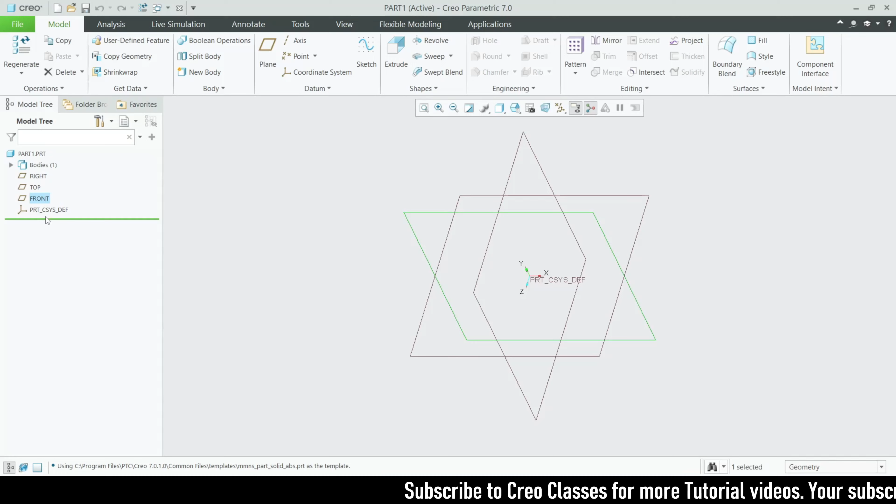This entire part that I'm going to create in this video is based upon my own dimensions. If you want to change it by your own, you can also change it. So I'm going to start with the top plane and go for the sketch view. Here at first I'm going to create a base for our assembly. I'm going to enter this dimension as 500 and this height as 300.

Then OK. Now I'm going to extrude this to a value of 20, then click on OK. So this is going to be our base part. I'm just going to save it and move on to the next part. We can close this, go for new again, click the template, and enter this name as part 2. We have to use the same unit we selected in the previous part so that we will be able to assemble it. So mmns part ABS.

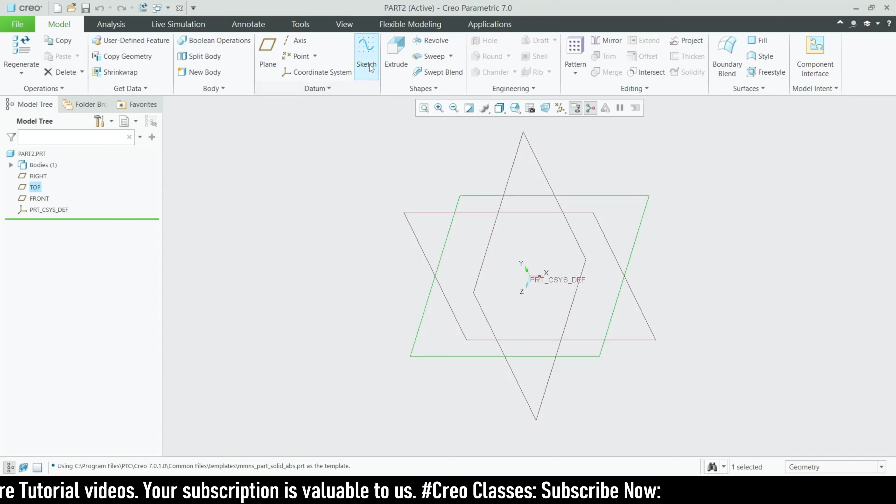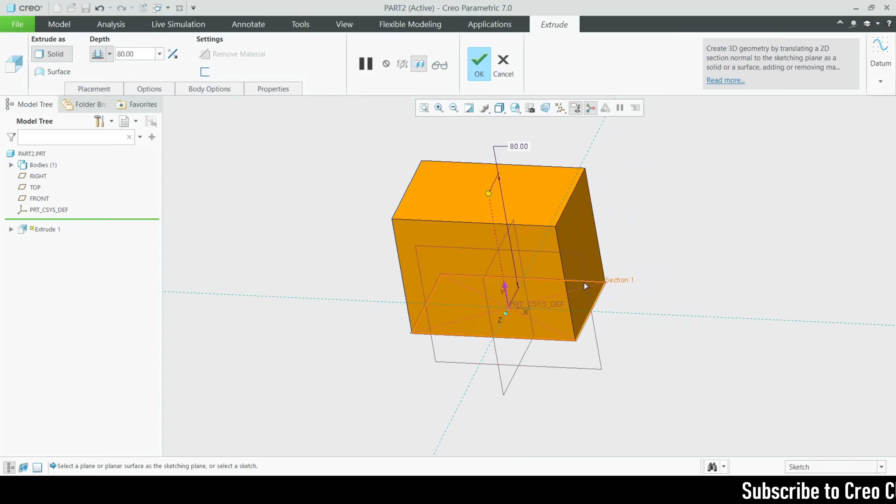Here also I'm going to start with the top plane, extrude, go for the sketch view. I'm going to use the center rectangle again, with a distance of 100 here and a distance of 60 here. Then I'm going to extrude this to a value of 80. Then click on OK. Now I'm going to create a round feature for these edges. So go for round, select all these 4 edges, with a round value of 20.

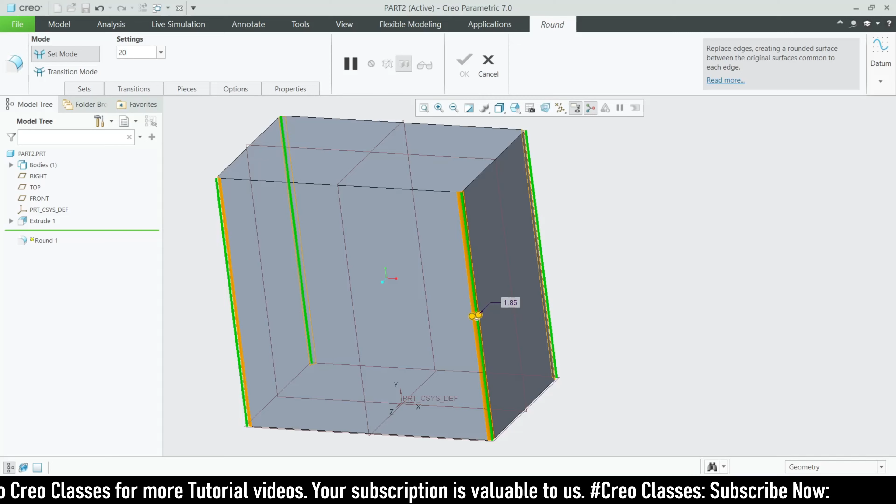Then click on OK. Now this is going to be our tank-like structure, so I need to create a hollow feature for this. For that I'm going to use the shell tool here. Select this surface and adjust the thickness to a value of 3 mm. Then click on OK. Then I'm going to create an input hole here, and we also need to create an output hole on the other side.

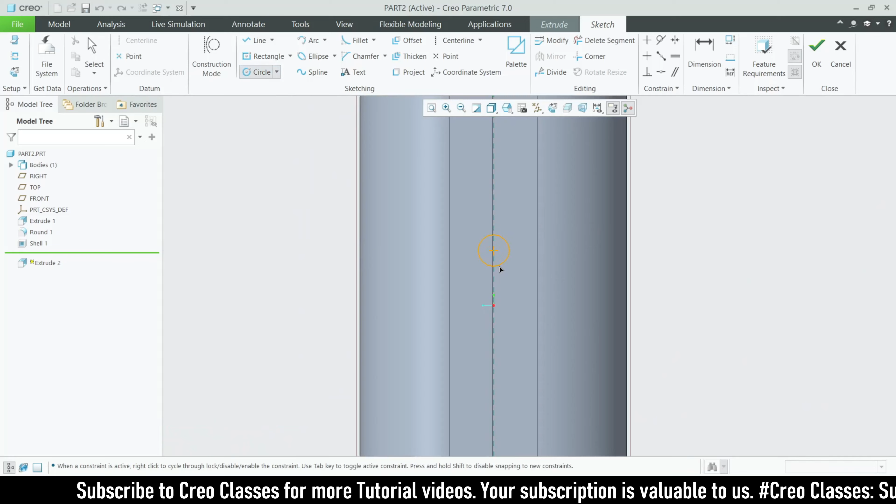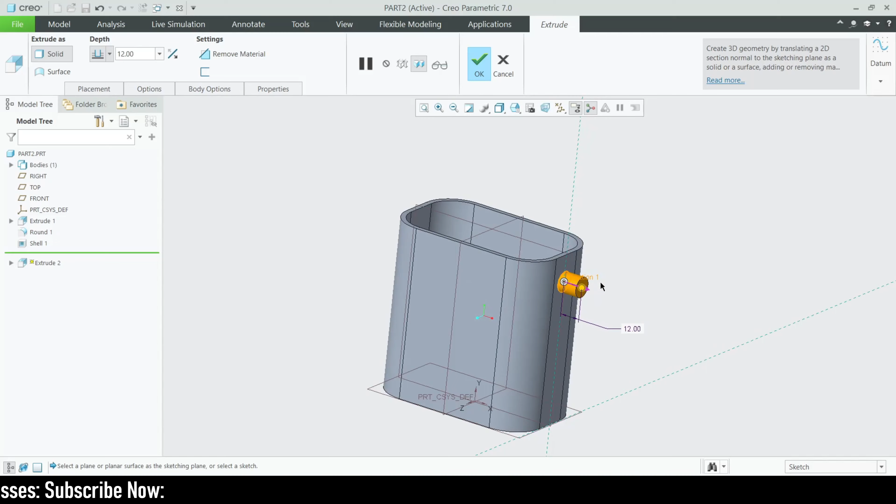So I'm going to select this face, go for extrude, go for the sketch view. Here I'm going to draw a circle and edit this dimension as a diameter of 12 and this distance as a value of 84, and then click on OK. Now I'm going to extrude this to a value of 12 on one side, but on the other side I have to extrude somewhat inside. If the water needs to flow inside, there needs to be some extruded part, right?

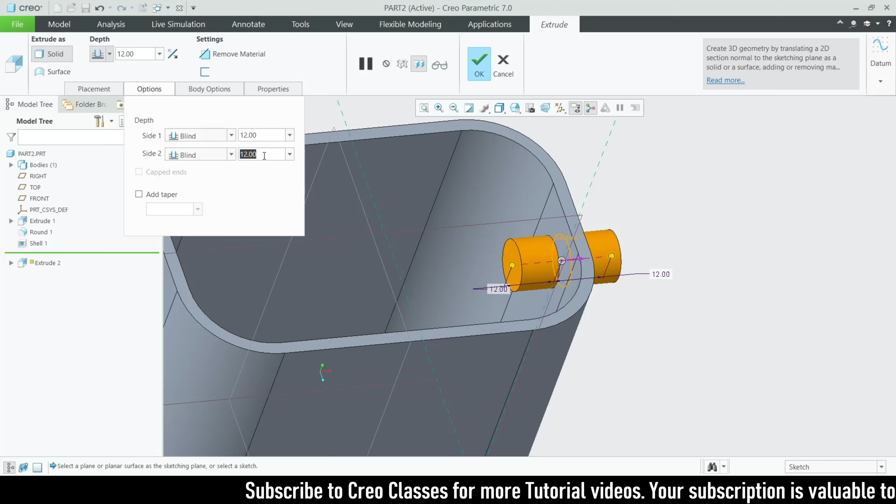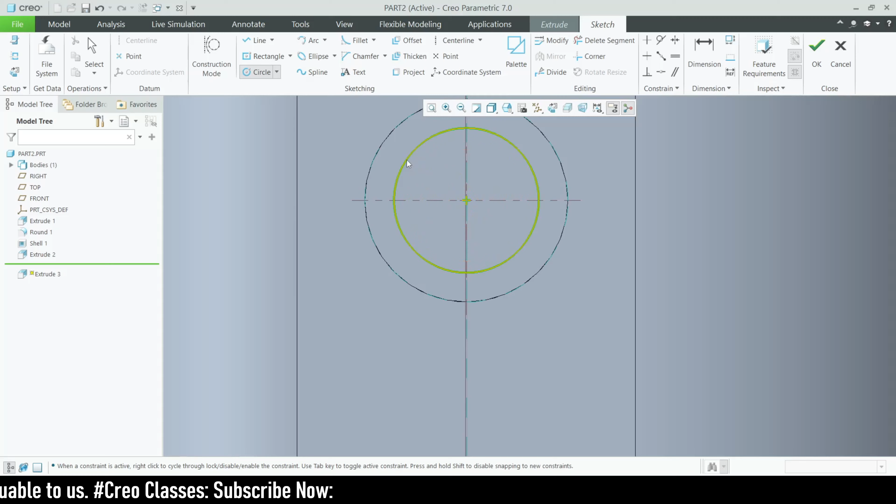So for that, I'm going to options, go for side 2. I'm going to use blind here, not a distance of 12, I'm going to use 6, and then click on OK. Now I'm going to create a hole for this extruded part. So go for extrude, go for the sketch view. Here I'm going to take the circle as a reference so that we are able to find the midpoint, and draw a circle with a diameter of 10.

Then click on OK. Now I'm going to create a hole feature for this. I'm going to flip the direction. It will automatically turn on remove material; if it is not turned on, you need to turn it on. Then I'm going to click on through all surfaces and then click on OK. So it's like an input hole, so it is on the top.

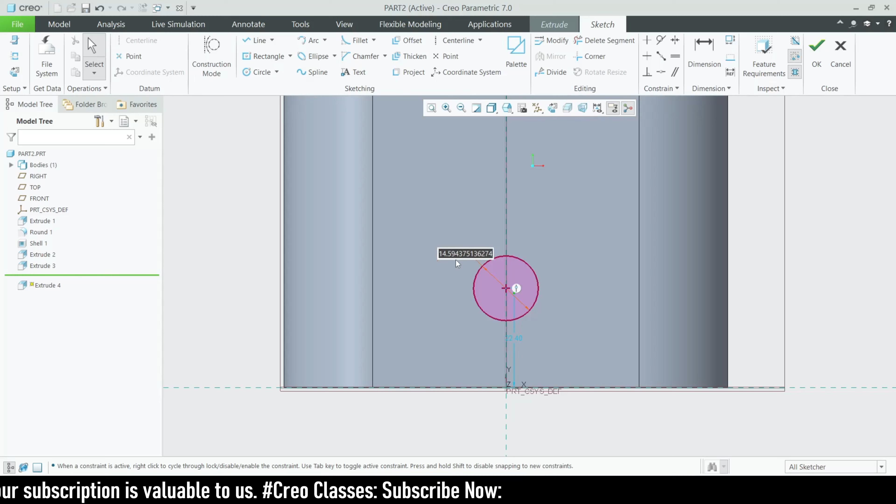So we need to create another output hole on this side. So I'm going to select this surface and go for the extrude view. We need to repeat all those things which we have done before. The same diameter as 12, and I'm going to adjust this height value to 20. So yeah, that's okay.

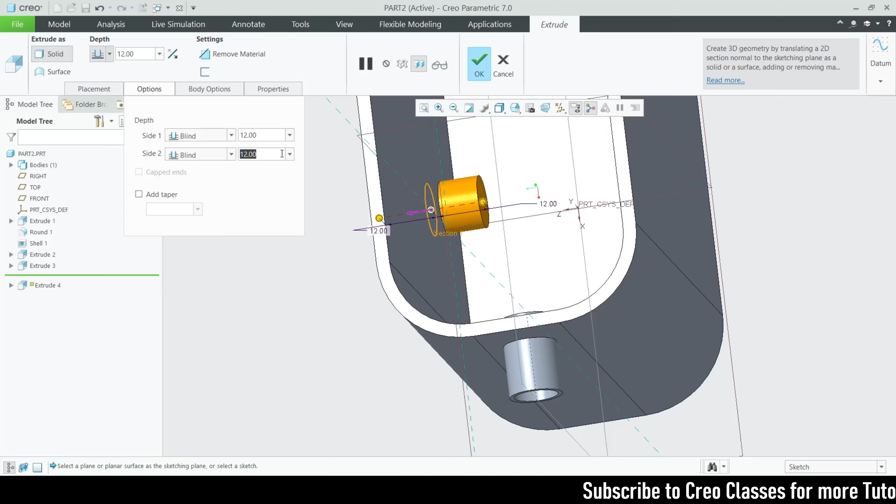Now we need to do the same on the other side also. So this value 12, it's okay for me. Going for side 2, blind with a value of 6, and then click on OK. If you need to add some taper for this extrude, you can also click on this add taper option. I don't want to add taper for this extrude, so I'm just leaving it as it is.

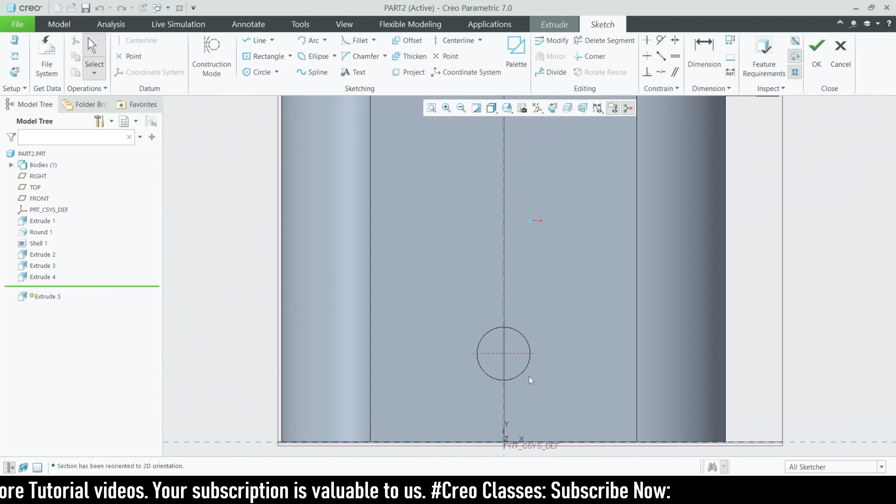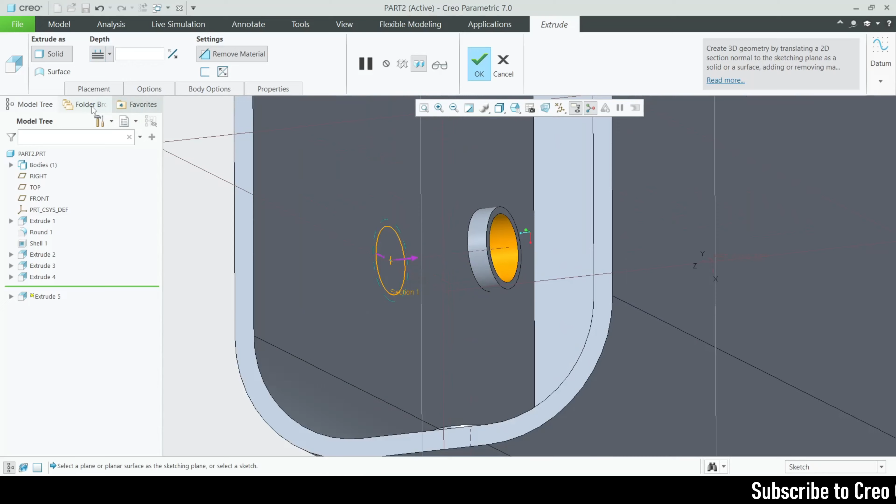So I'm going to select this surface for extrude. I'm going for a sketch. Select this circle as a reference circle. I'm going to draw another circle with the diameter of 10 and then click on OK. Now I am going to flip the direction with the remove material option. So it is OK. Now I am going to give the through all option so that you can see the hole is created inside also. Then click on OK.

So that's all guys. We have done our second part also. So let's save this part on the same working directory. Click on OK. Now let's close this. Let's move on to the third part. I'm going to rename it as part 3. Solid part, mmns_part_solid ABS.

So for this part 3, I'm going to create the same part which we created for part 2, like you have seen before. I'm going to create it exactly like before, but we have to change the dimensions of the two holes, input and output. So I'm going to edit those dimensions only. Let's repeat all those things which we have done before.

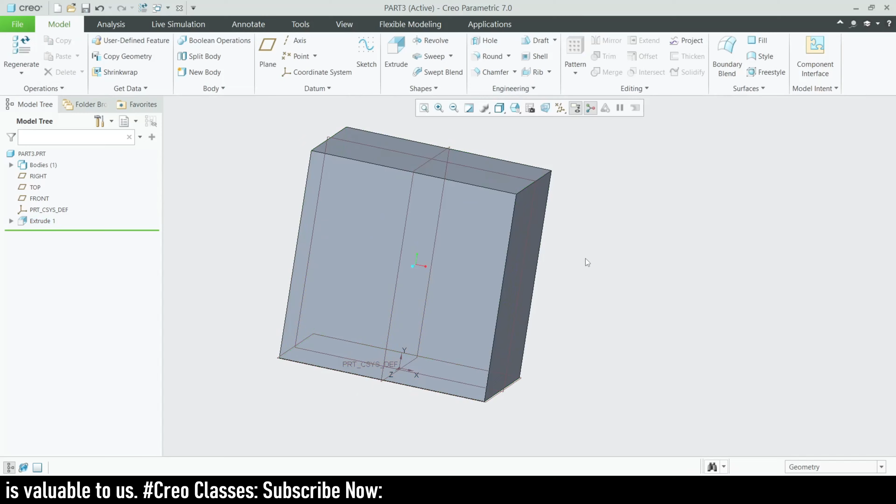I'm directly going for the extrude. The same center rectangle, 100 by 60, click OK. Extrude value as 100. I'm doing it fast, guys, because we have done this before. So I'm going to repeat all those things again. Select all those edges. That's all. Shell with the same thickness value as 3.

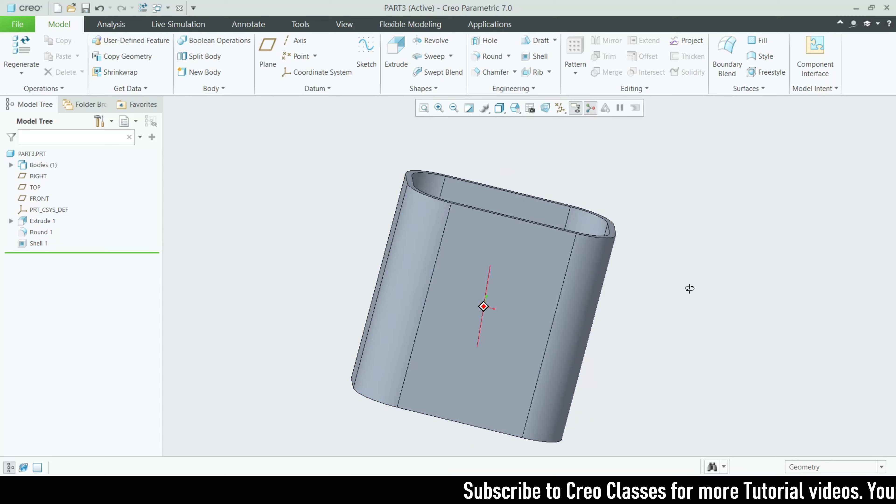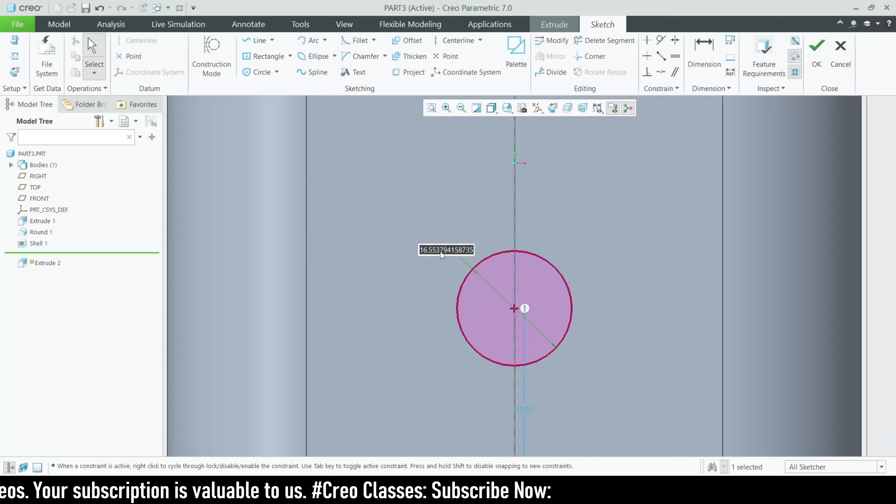Up to this we can do the same, but after this we need to create the input and output holes. In part 2, the input hole we created here and the output hole we created here. So for part 3 we are going to create the output hole with the same dimensions, and we have to change the input hole only. This distance was 20, as we entered before. The extruded length is the same, and for side 2 blind we need a value of 6. Same surface, go for the extrude view.

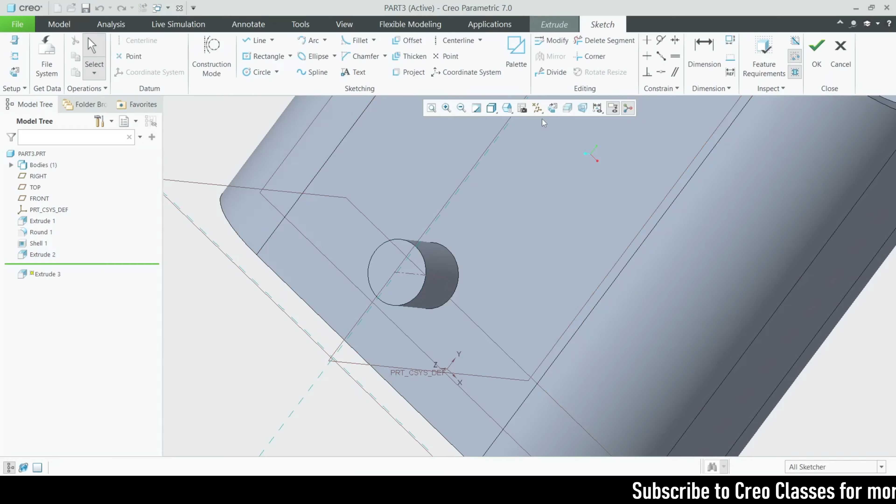I'm going to select this surface, circle with the diameter of 10, then click on OK. Flip the direction with remove material, click on through all option and then click on OK. So we have created this output hole, but we have to create the input hole on this side. For part 2 we created it on this side, so for part 3 we have to create it on this face.

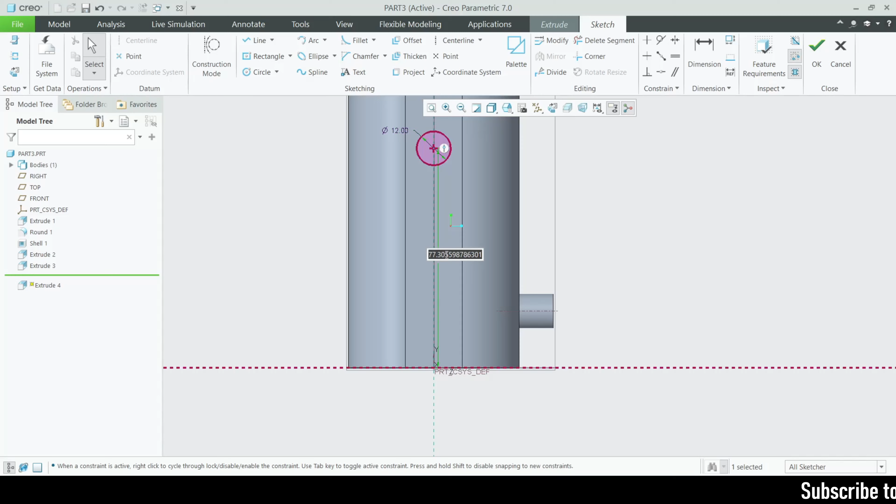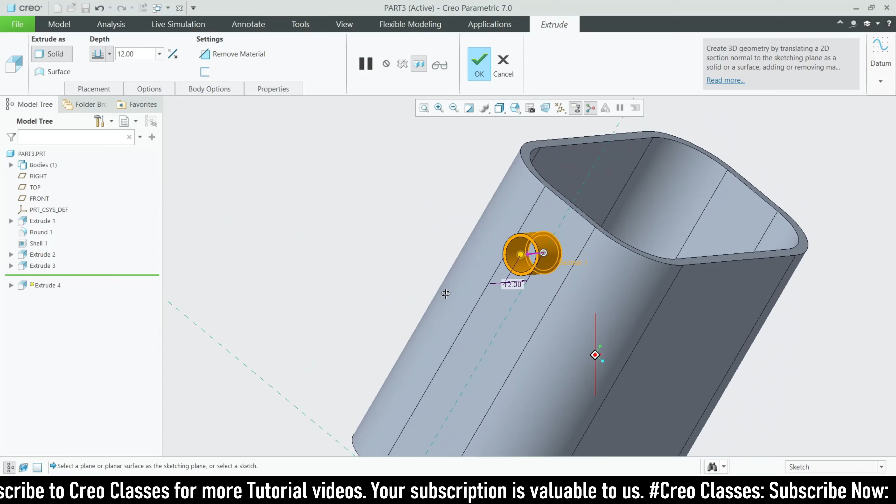So go for the extrude, the circle with the diameter of 12, and then this distance as 84. Instead of doing those extrudes again and again, I'm directly drawing another circle here with the diameter of 10 and then click on OK. If we do it like this, you can see we need to create another extrude for creating this hole. Okay, let's try this option also.

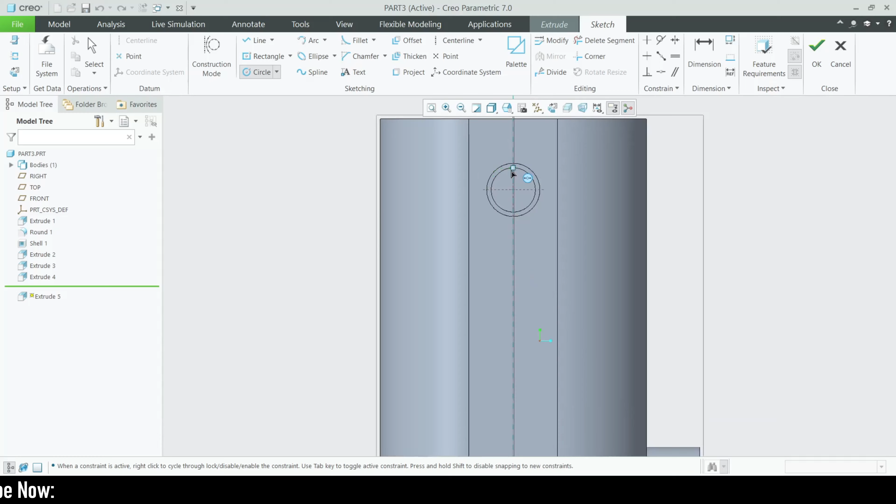Let's go for side 2 blind. I'm going to enter a value of 6, then click on OK. Now you can see the inner wall is fully closed. I'm going to extrude again, and draw a circle up to this reference. Click on OK. Flip the direction, remove material, and then through all extrude. So this is how we created our next part. So that's all, guys. We can save this part and move on to the next part.

So let's close this and create a new part again. Rename it as part 4, and I'm going to select this template as part solid ABS. For this part, I'm going to create a container shaped structure for storing water.

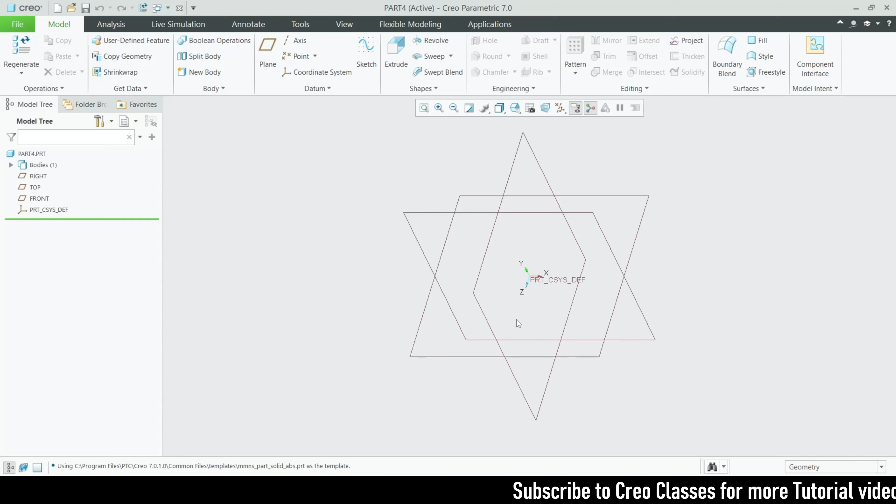We are going to create some input and output pipeline features, since there should be some storage tank. So we will put input and output, and create a storage container like structure.

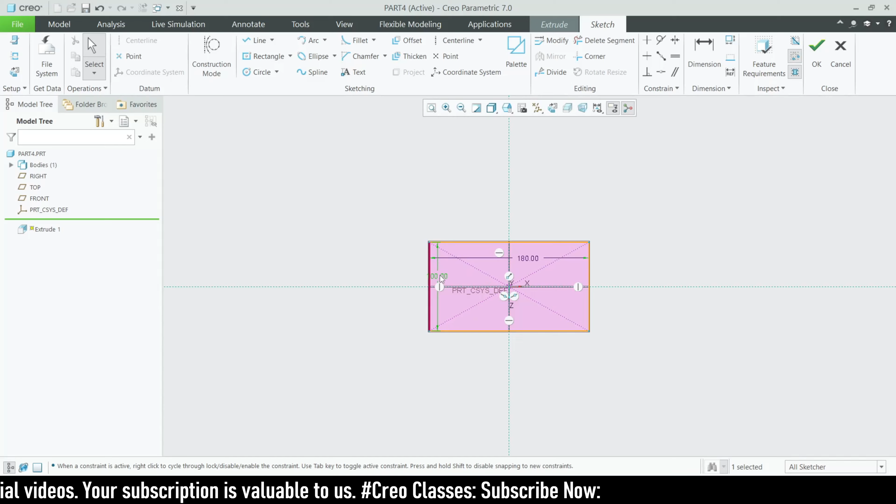I'm going to select this top, extrude, and go for the sketch view. Here I'm going to draw a center rectangle with dimensions of 180 as length and 100 as length, then click OK. Now I'm going to extrude this to a value of 40 and click OK.

As I already said, it is a container, so we have to create some shell for this. I'm going to add this thickness as 4 and then click OK.

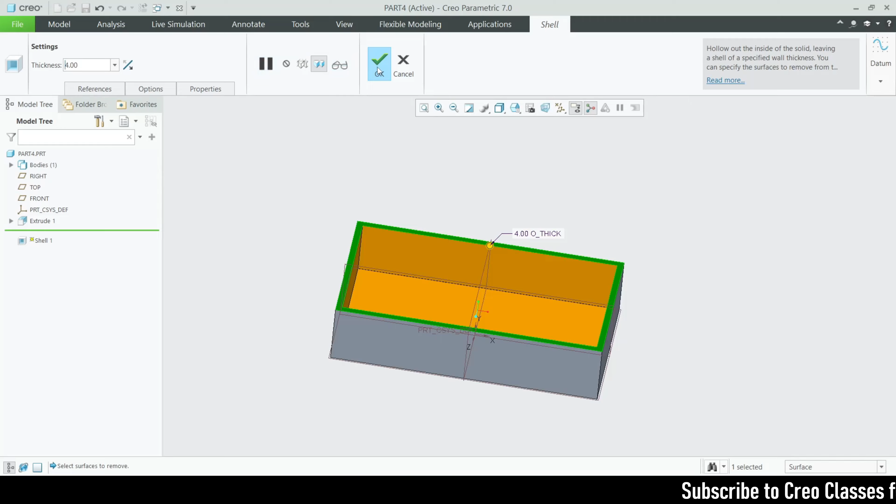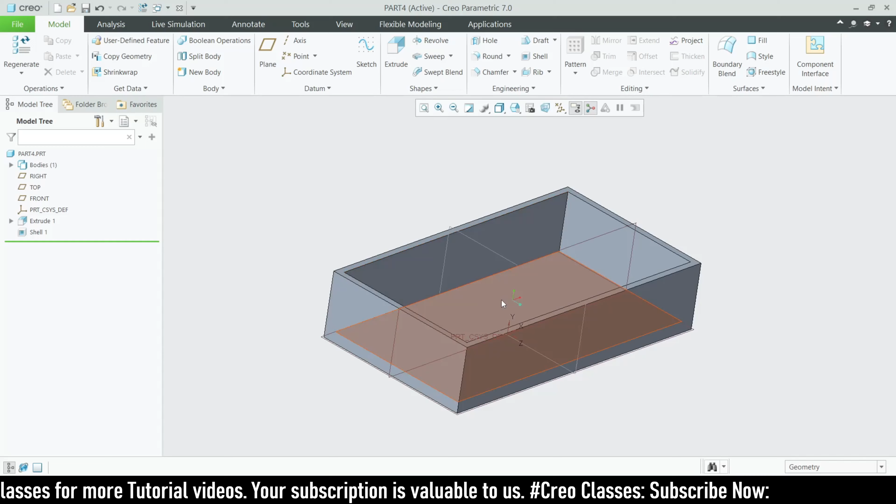Now like we have done before for those two tanks, we created input and output lines. So for this container also we should create some input and output lines. Input is okay since this is where the water is going to be stored, so we are going to create only two inputs, one from each tank. For this I'm going to select this surface.

I'm going for extrude view. Here I'm going to draw a circle with diameter of 12, as we entered all these diameters the same, and I'm going to add this distance to a value of 20, then click OK.

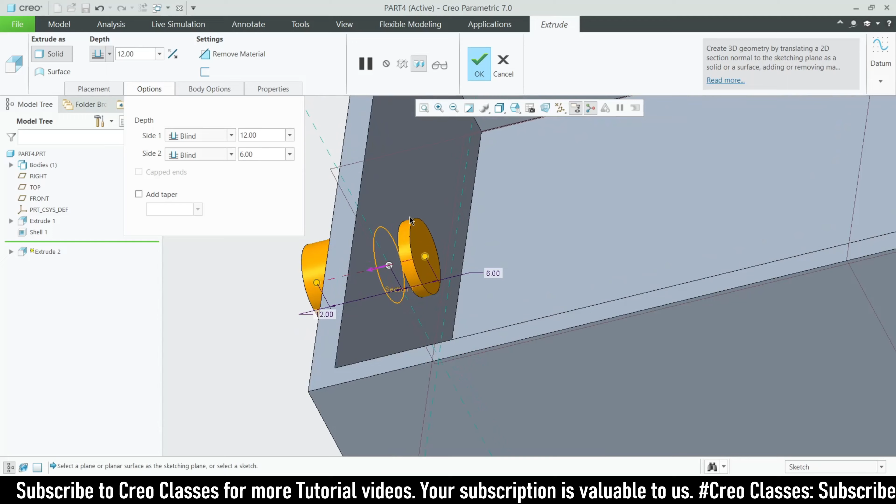Extruded value as 12, and for side 2 I'm going to use blind. But if we use 6, it will be very small on the other side, so I am going to use a distance value of 10 here, then click OK.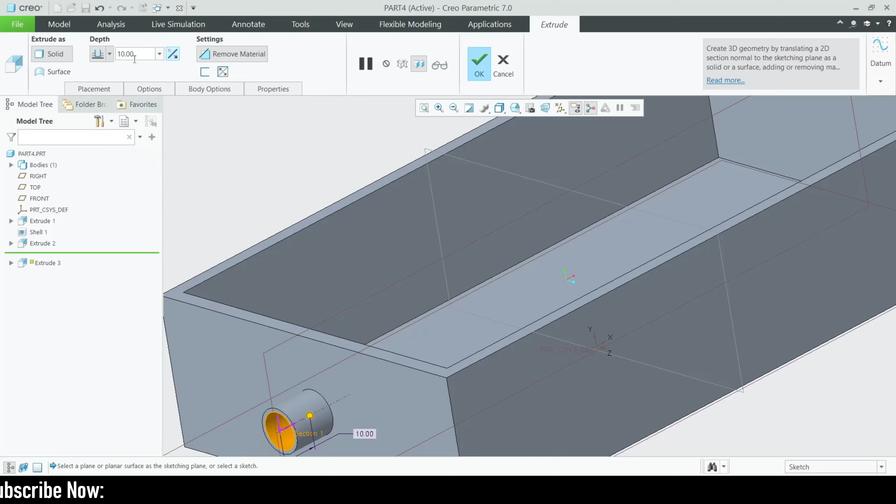I'm going to select this surface again, go for extrude, and draw another circle with a radius of 10, then click OK. Flip the direction and select the through all option. As you can see, our hole is created.

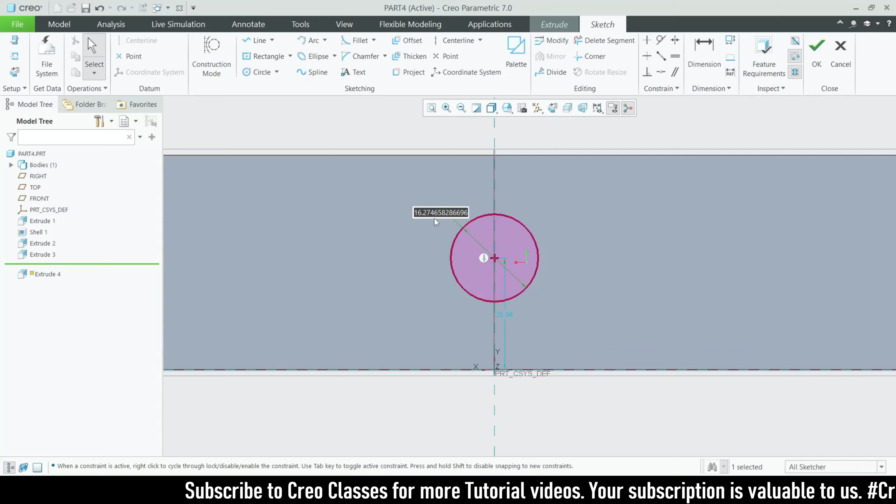Now I'm going to create another input hole on the back side. I'm going to select this surface, go for extrude, and go for the extrude view. Here I'm going to draw a circle with the same diameter we entered before, and this distance also 20.

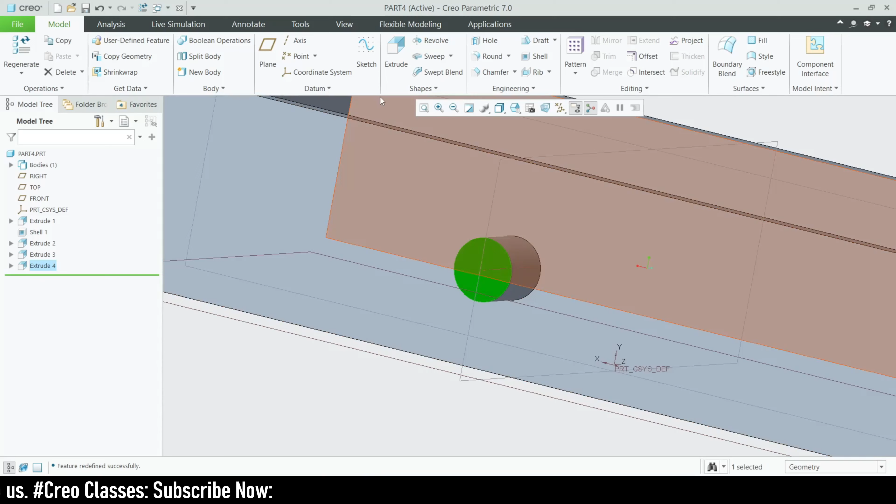Go for extrude view, and here for side 2 I'm going to use the same blind value as 10, then click OK. Select this surface again, go for extrude, and take reference for the circle, close it. I'm going to draw another circle with a diameter of 10, click OK. Now I'm going to flip the direction, select through all option, then click OK.

So now our storage container box has been created. I'm going to save this part as part 4. Now close this, and we are going to create the final part, which is part 5.

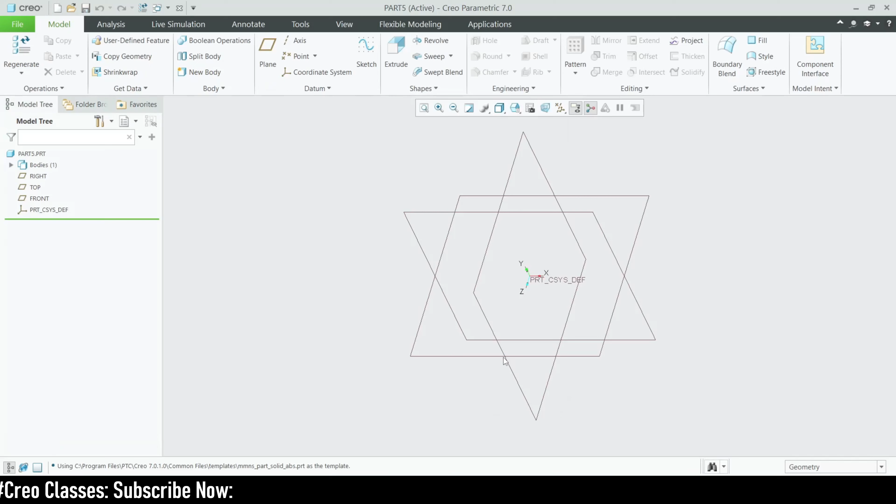Select this template as part solid ABS. Here I'm going to create a big tank from which water can be imported for both primary tanks and the storage container. So for this we need to create a big container.

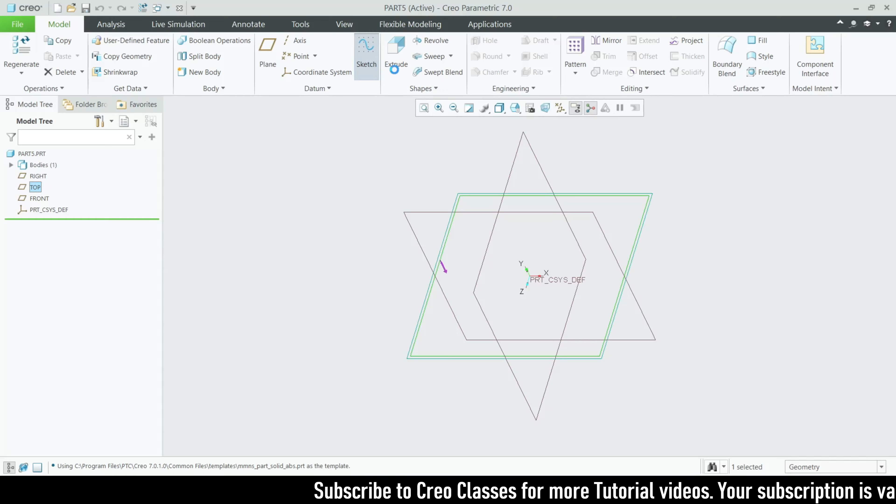I'm going to sketch on the top plane, go for the sketch view. Here I'm going to draw a circle with a diameter of 100, and extrude this to a value of 200, then click OK.

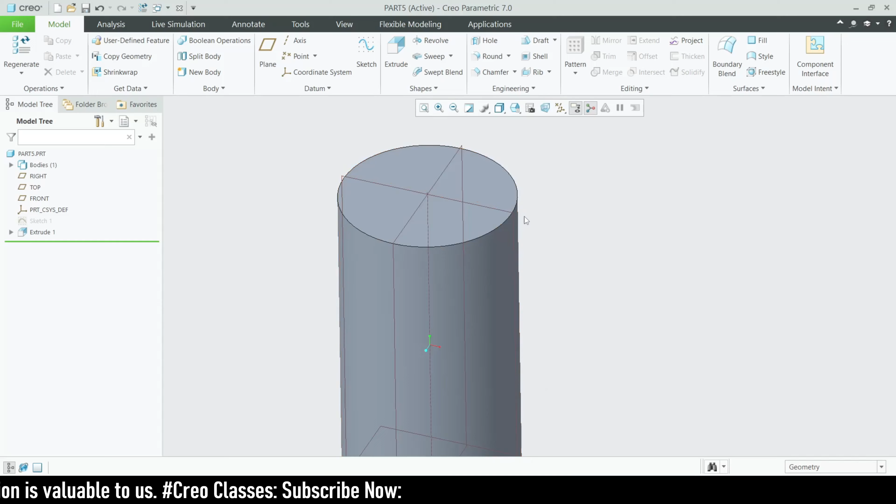Now for this we need to create a hollow feature. I'm going to create a shell with thickness of 4, then click OK. As it is a tank, we need to make it a hollow structure.

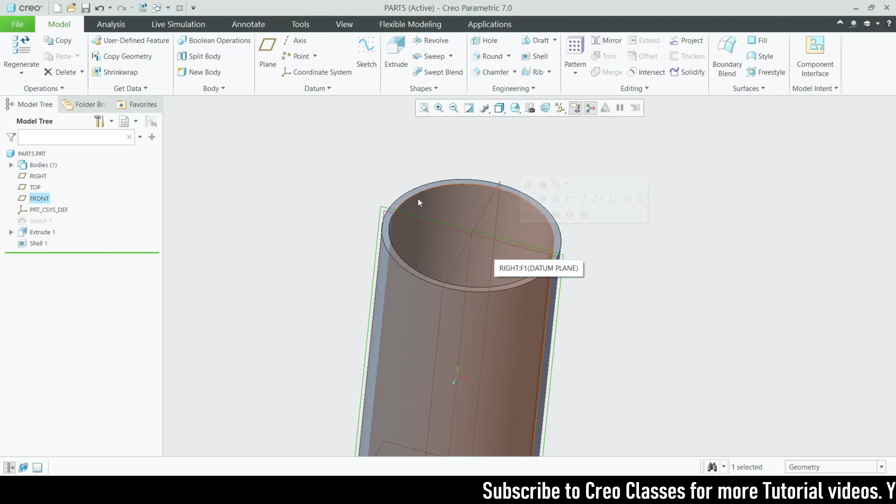So now I'm going to add some cap, because if the water gets opened, dust particles or other things could get in. So I'm going to create a cap for this. Let's go for sketch on this plane.

Here I'm going to take reference for this surface. I'm going to draw a line like this, and adjust this length to a value of 60. I'm going to create another point here, with this distance also 60. Now let's create a 3-point tangent arc like this, and adjust this radius value as 64.

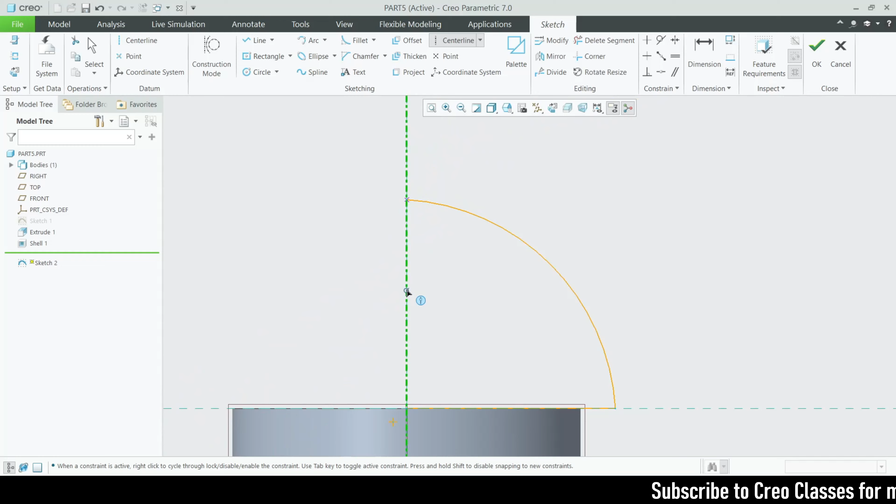For the revolve tool we need to create a center line. So we created the center line and clicked OK. Now we can go for this revolve and make it a solid. That's all guys, our top part has been completed.

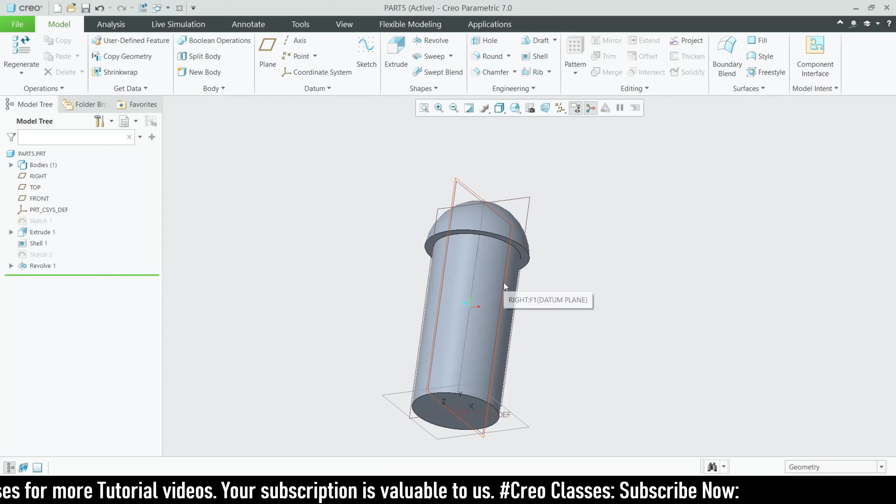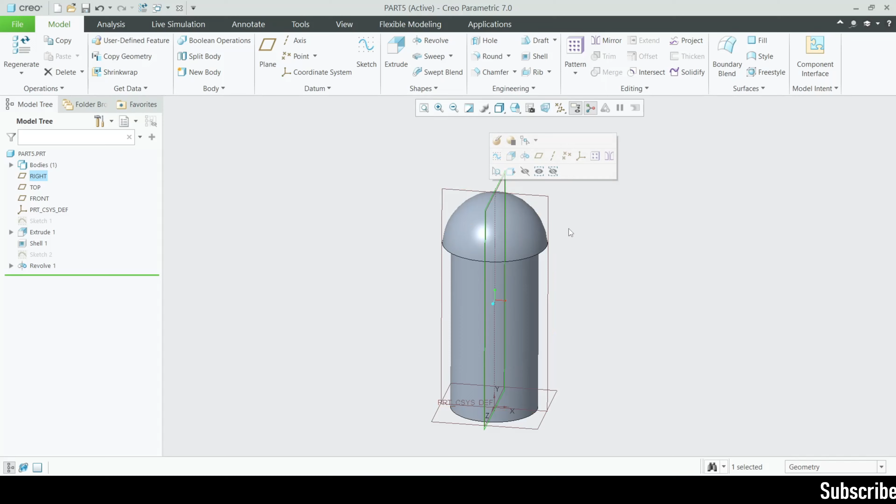For this part we also need to create two output holes. To create these two output holes, we need to create a hole from here. For that we need to create another plane, taking this right plane as a reference plane, and in that new plane we need to sketch. So go for plane, select this right plane and drag like this. As we know, the distance from the center plane to this edge is 50.

We are going to extrude the output circle to a value of 12, so I'm adding 12 here. So this is our plane. Then click OK. I'm going to sketch on this plane, go for the sketch view.

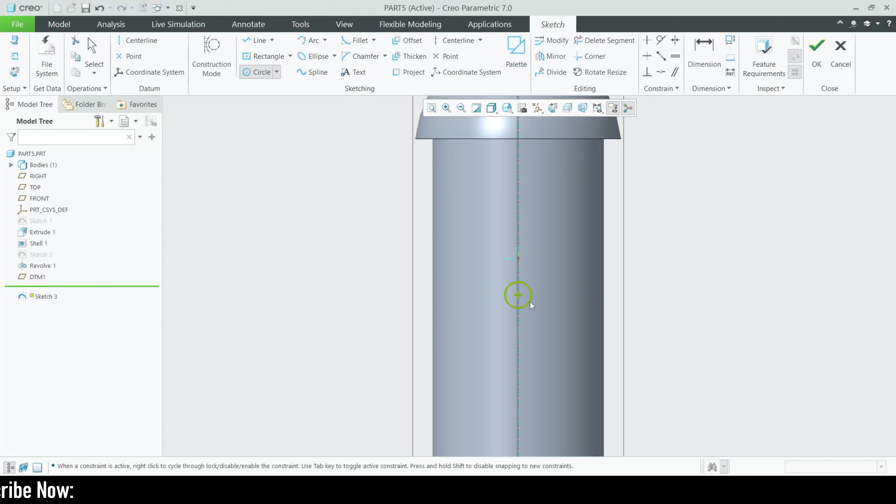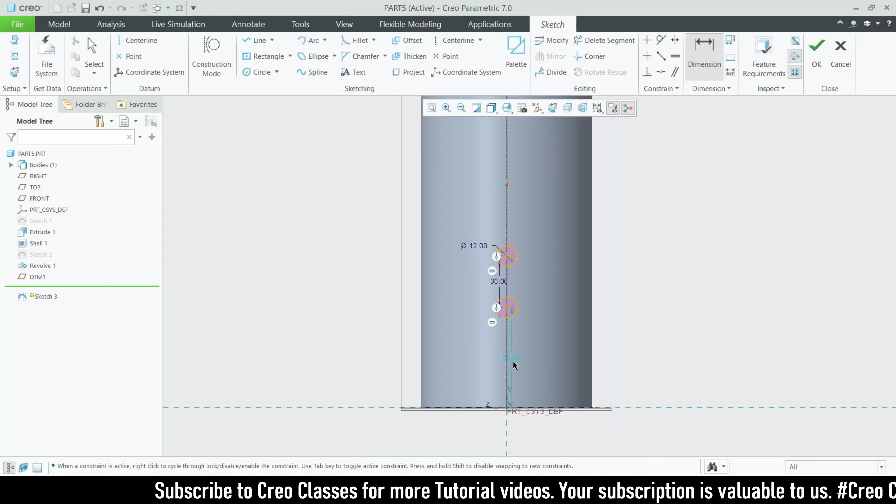Here I'm going to draw two circles, two output circles. We can draw from any distance. Another circle with equal dimensions. I'm going to edit these dimensions, entering a value of 30 between them. So here 70, or yeah, 90 is okay. Then click OK.

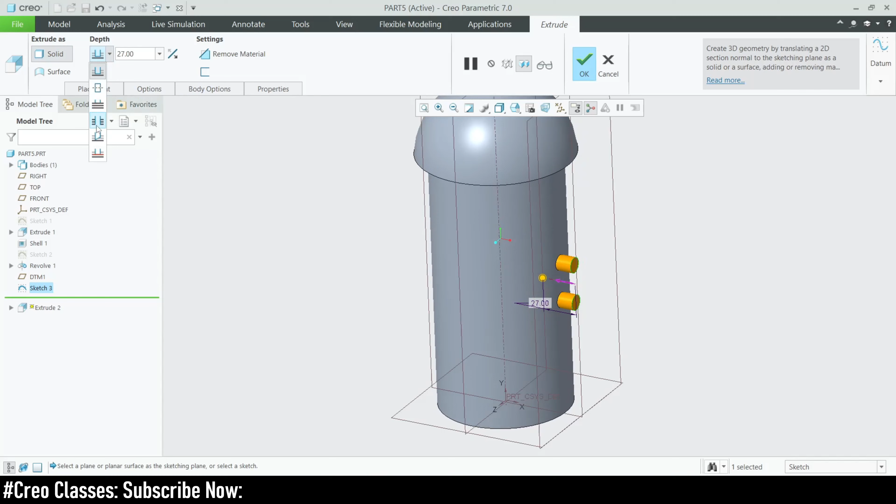Now I'm going to extrude this, flip the direction, and set it up to the next surface. Then click OK.

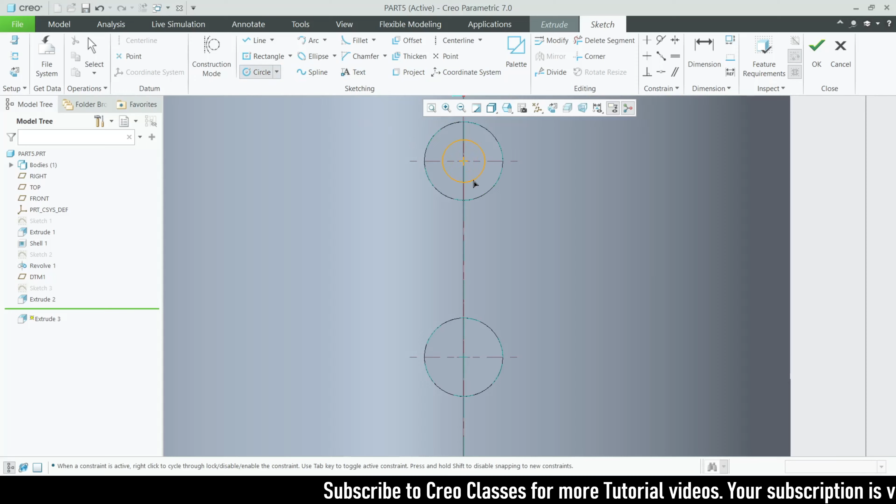Now I'm going to select this surface again, go for extrude and go to the sketch view. Here I'm taking a reference for these two circles, creating a hole feature for them. I'm making these two circles an equal constraint, so that if we edit one dimension, the other changes automatically. Then click OK.

Now flip the direction as a remove material option. You can click this through-all section to see the inner structure. Then click OK.

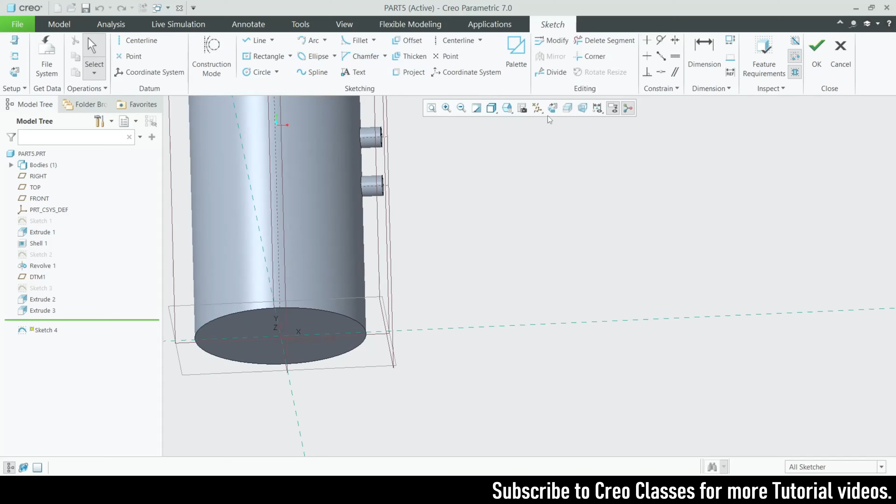Now our part has been completed, but we need to create a stand-like structure for fixing this tank. So I'm going to select this bottom surface, go for sketch, and go for the sketch view. Here I'm going to create a circle with a diameter of 12 at a distance of 37.

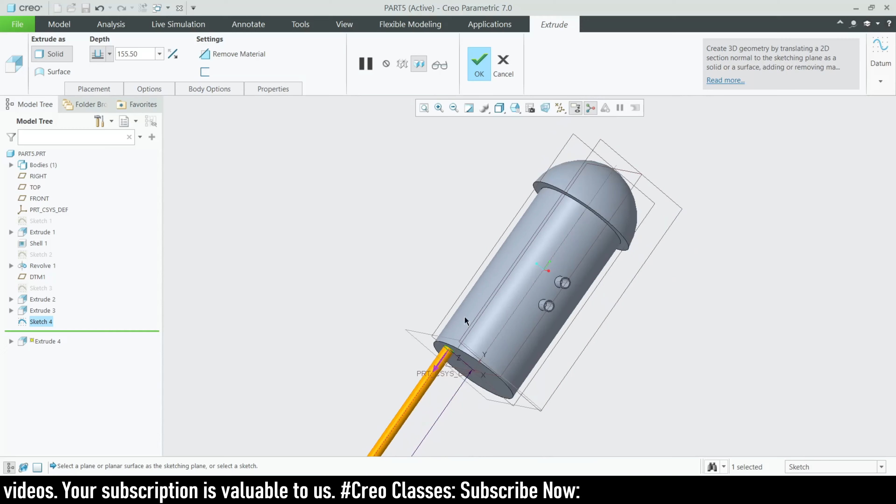I don't want to spend more time on this stand, guys, as it's not going to play a big role in this part. So I'm going to add somewhat normal dimensions here, and set the extrude value as 80. So we need to convert this to 4.

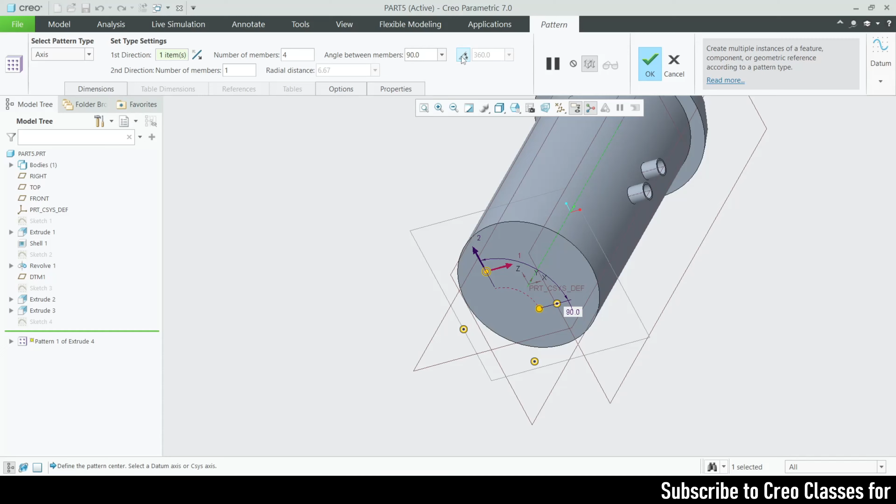So I'm going to select this and go for pattern, select axis pattern, select this center axis, and set the angle as 360, with the number of members as 4. That's okay, then click OK. Now our final part has also been completed.

Okay, we are good to go. Let's go and assemble all these parts. I'm going to save this part first, then click OK.

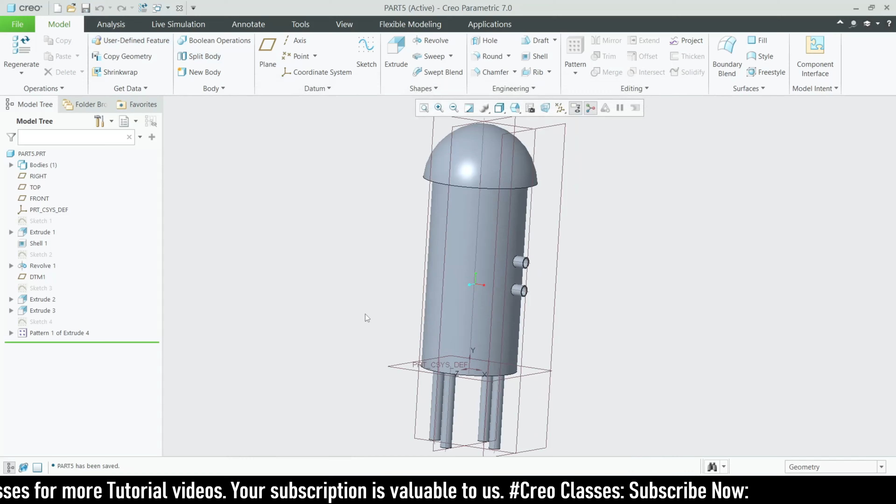Let's close this part and go for the assembly, clicking the default template. I'm going to rename this file as pipeline underscore ASM. Here I'm going to select the template as MMNS ASM design ABS. As we selected ABS before, we have to select the same here.

Here I'm going to assemble all our parts, but we need to assemble the base plate first. Go for the preview - this is the base plate we created. So open it. For this base plate, I'm going to use the default template for this. Then click OK.

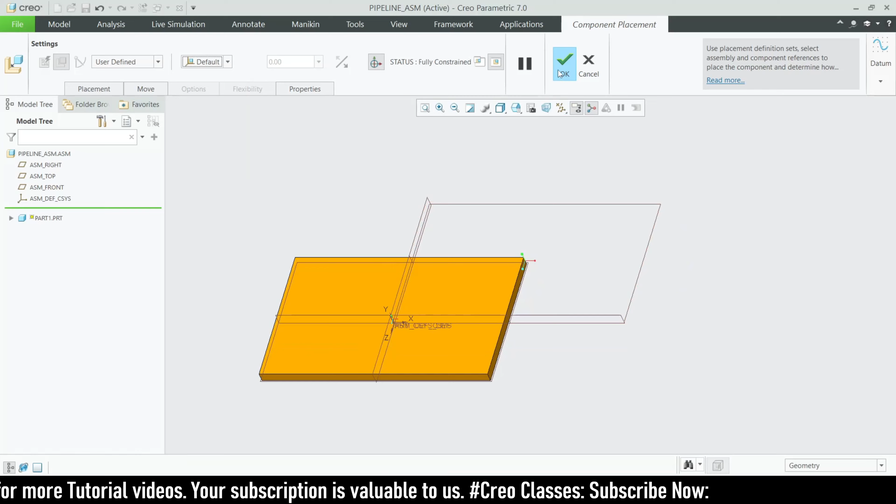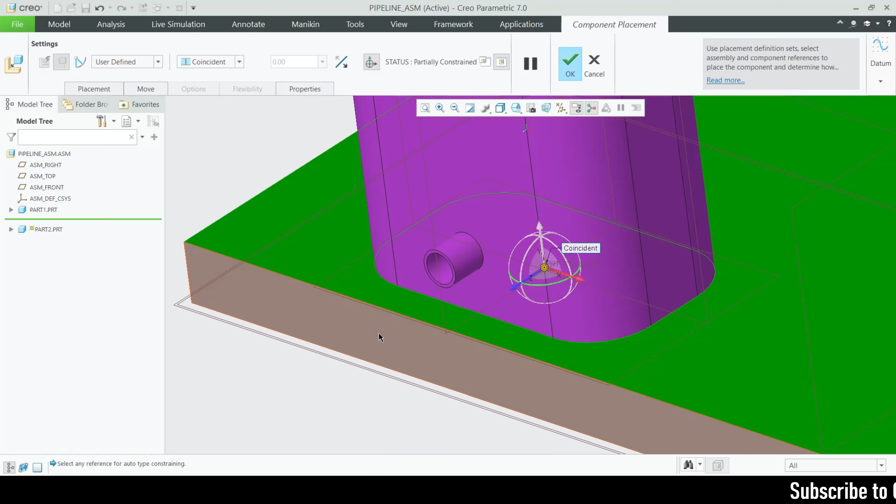Let's assemble the other parts, starting with the second part. I'm going to select this bottom plane and this top plane and make them coincident. Now I'm going to select this face and this face and make it a distance, with a value of 30.

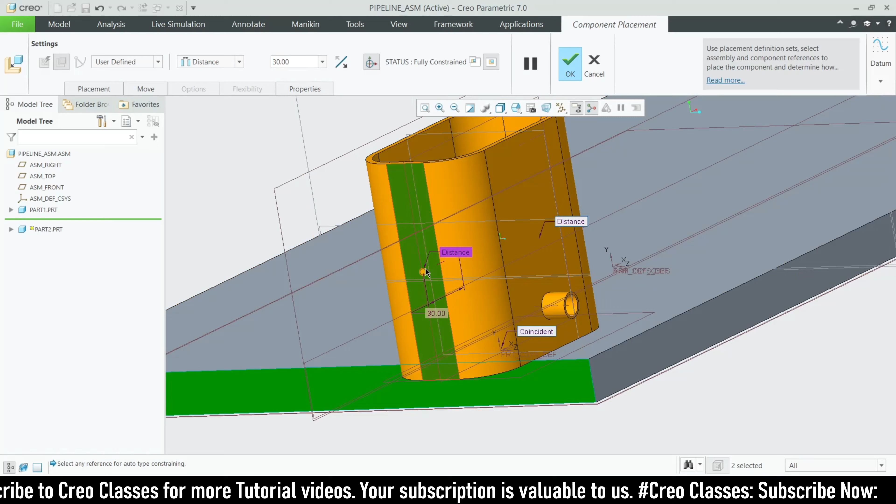For this side also, I'm going to select this surface and this surface and set the distance as a value of 30. It's on this side, right? So we have to drag like this and enter a value of 30. So our first part has been assembled. Let's click OK, and now let's go for the second part, which is actually the third part.

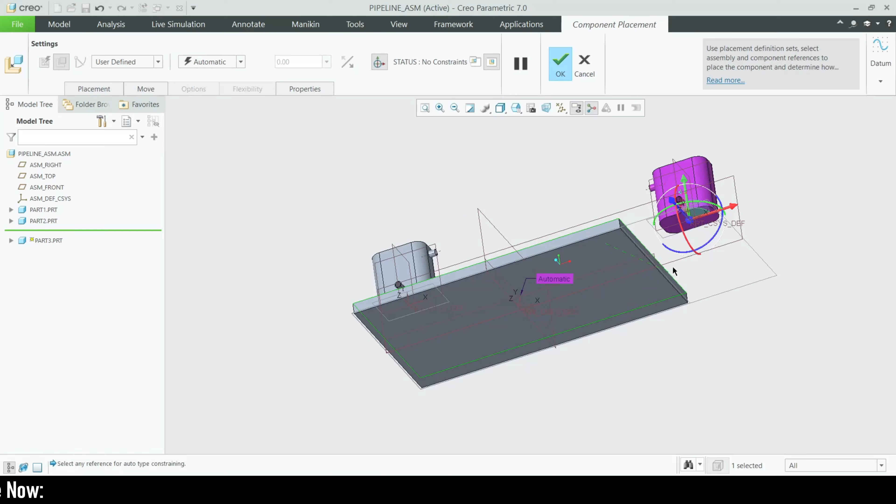Open it, the same as we've done before, we have to repeat that. Select this surface, make it as a coincident. Drag like this. Now I'm going to select this surface and then this surface, make it as a distance, drag like this, and enter a value of 30.

Now I'm going to select this surface and this surface and set the distance value of 30 here. Then let's click on OK. Now our three parts have been assembled successfully.

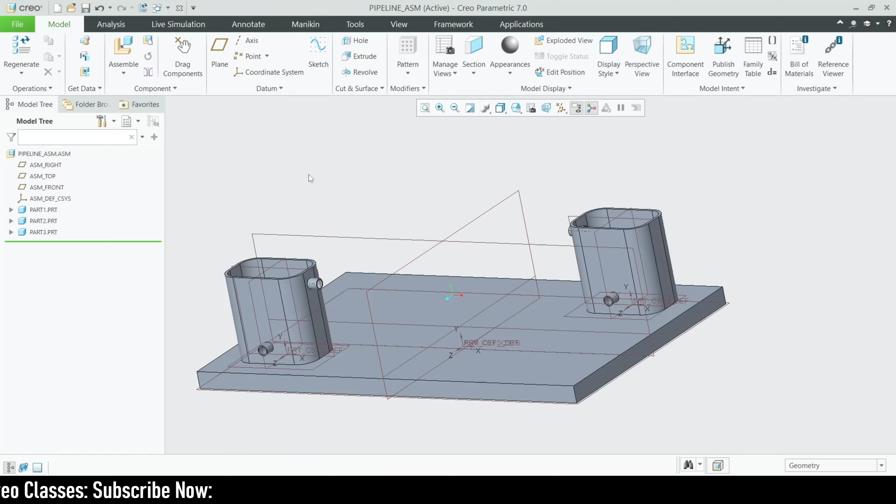Let's go for the third part. For the third part, we can import this big tank. Open it. For this, I'm going to select this surface and this bottom surface, make it as a coincident, and then drag like this.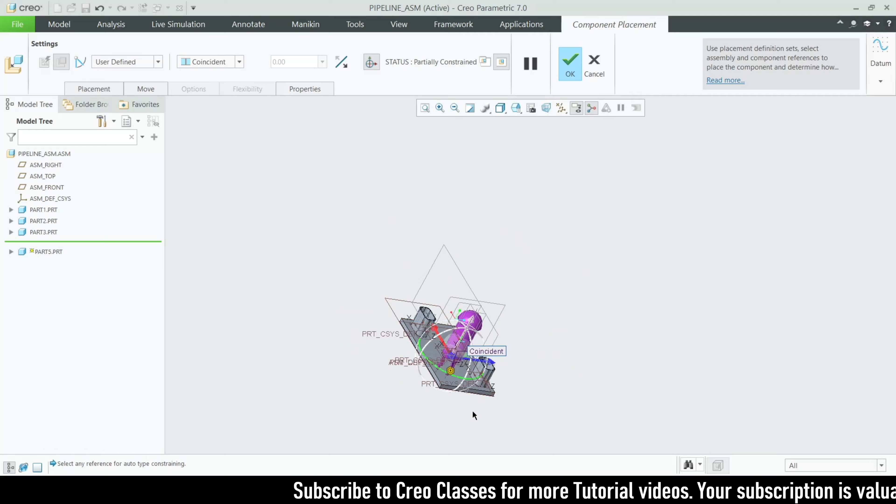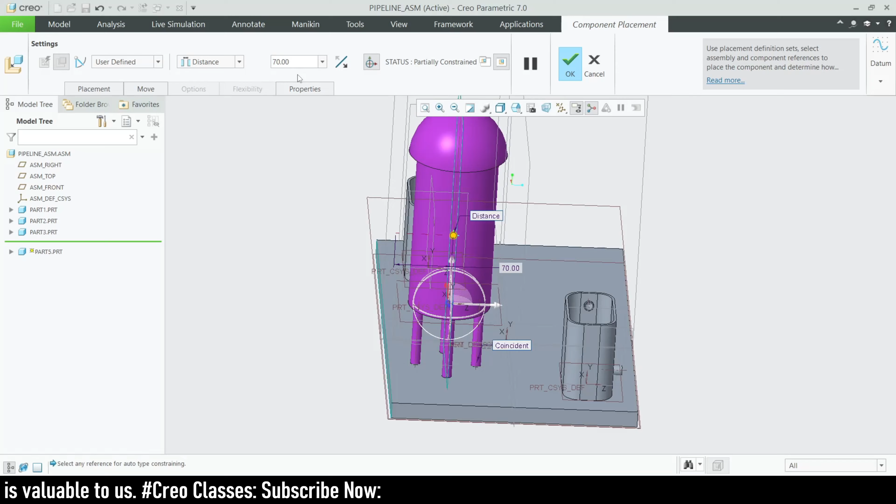For this, I'm going to select this surface and this part center plane, make it as a distance, drag like this, and enter a value of 70. And for this side also, select this surface and select this plane, make it as a distance, drag like this, and enter a value of 70, then click on OK.

So now our part has been completed. Let's assemble the final part. Select this bottom container. Here we have to repeat the same.

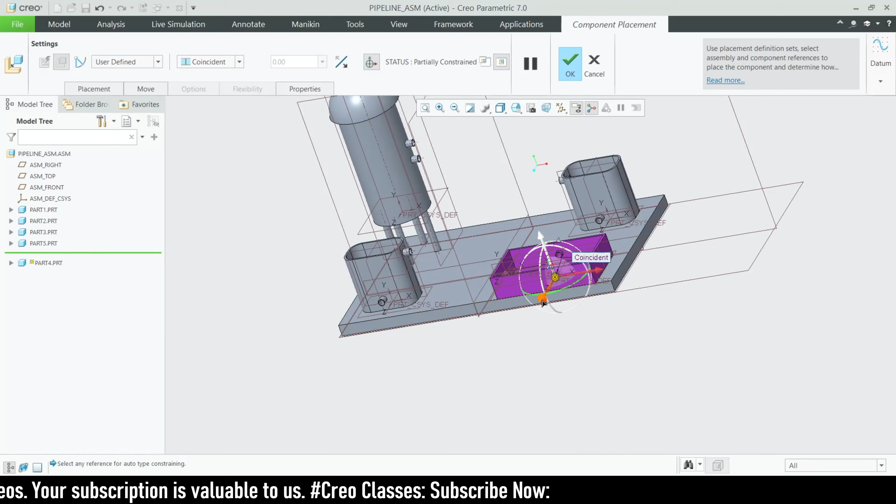Select this bottom surface and select this top surface, make it as a coincident, drag like this. Then let's select this surface and this surface. We can create some distance feature here, drag like this, and I'm going to add a dimension of 20 here.

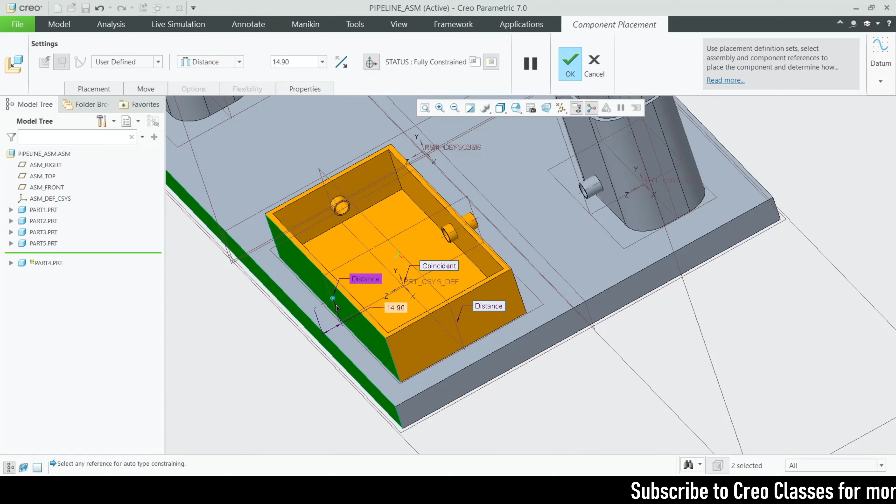Then select this surface and this surface, and here also I'm going to add a distance of 10. If we put 10, it looks too near for that part, so let's give 20. Then click on OK.

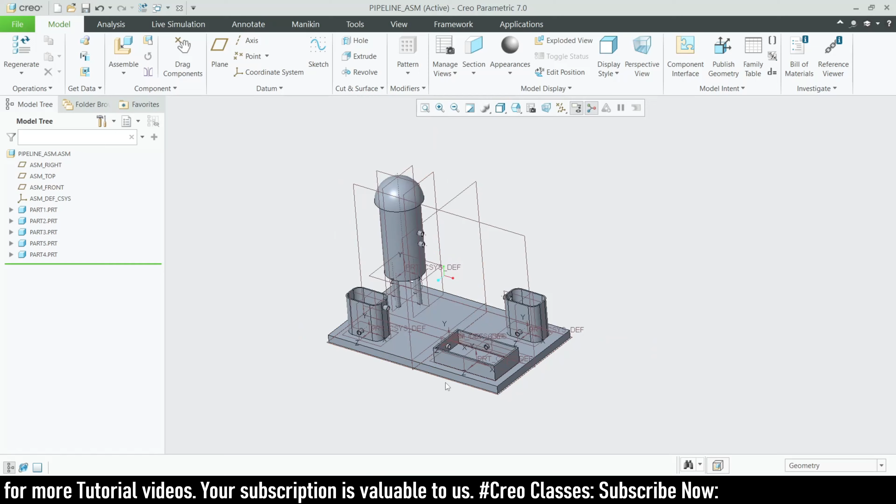So yeah guys, that's all. Here we have created almost 5 parts and we have assembled all those parts correctly.

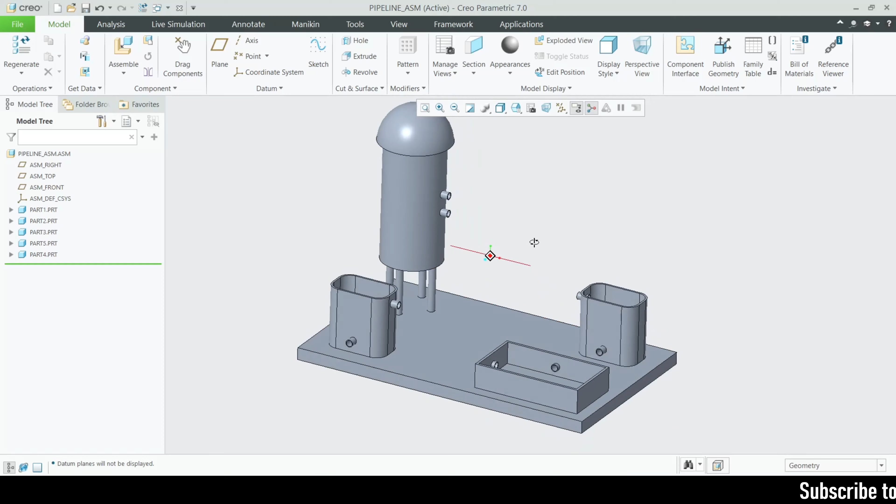So we can give some appearances for this part. After doing the piping option, we can also give some separate color for the pipelines. I'm going to give appearances for all these parts. I'm going to select this composite color, yellow color, for this external surface of this tank.

Click on OK. And then for this surface also, click on OK. Now, for this big tank, I'm going to give the same black color for this entire component.

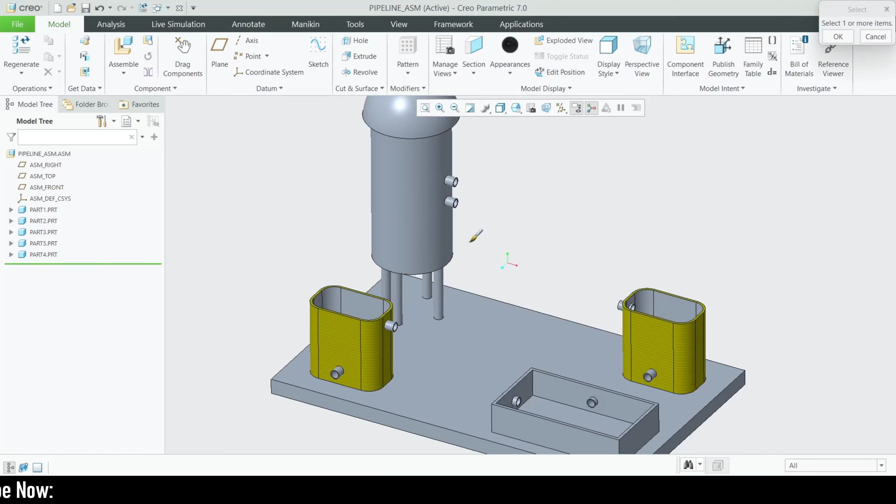And then I think we can also give this yellow color for this part also. So I'm going for intent surface, select this part and this part, the input and this output hole, and then click on OK.

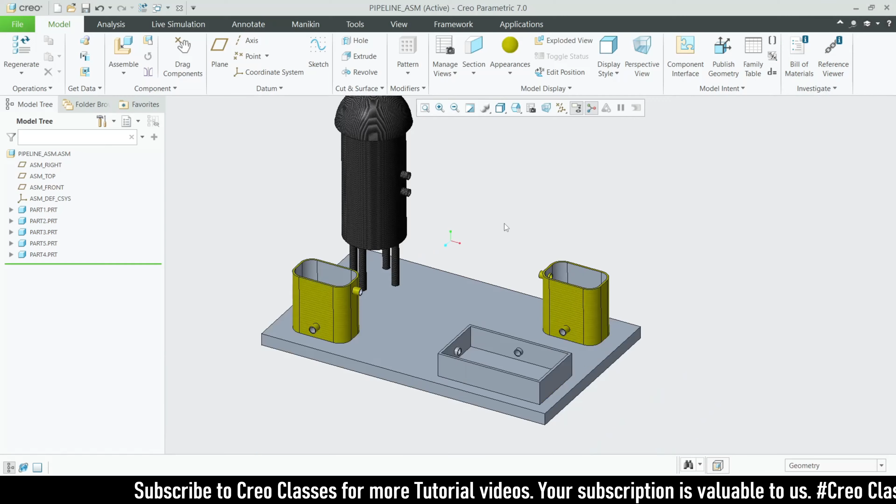So now we need to give some more colors. For the pipe, after creating that pipe only, we'll be able to give color, so we'll see that in the next video. I'm going to give some dark blue color for this tank. Select this part and then click on OK.

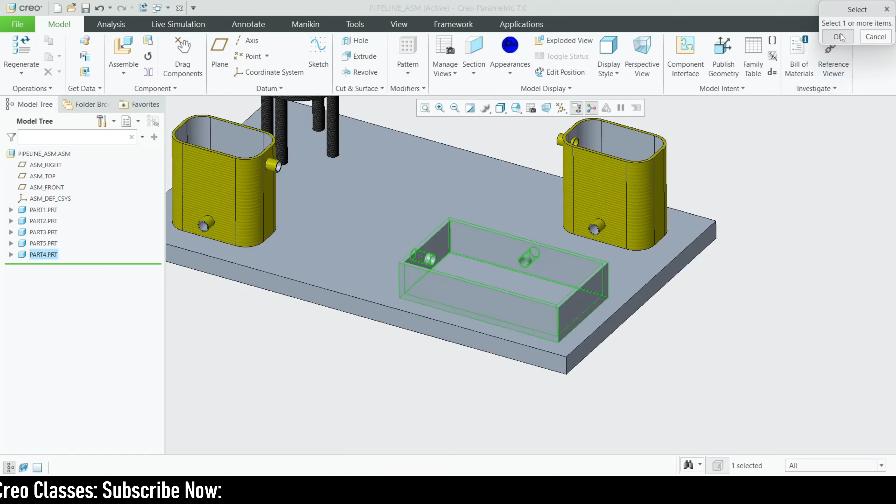Okay, for the base plate, I'm going to give, we can create a color. Going to create it as a paint color, reduce all these. I'm going to give like this dark green, was it?

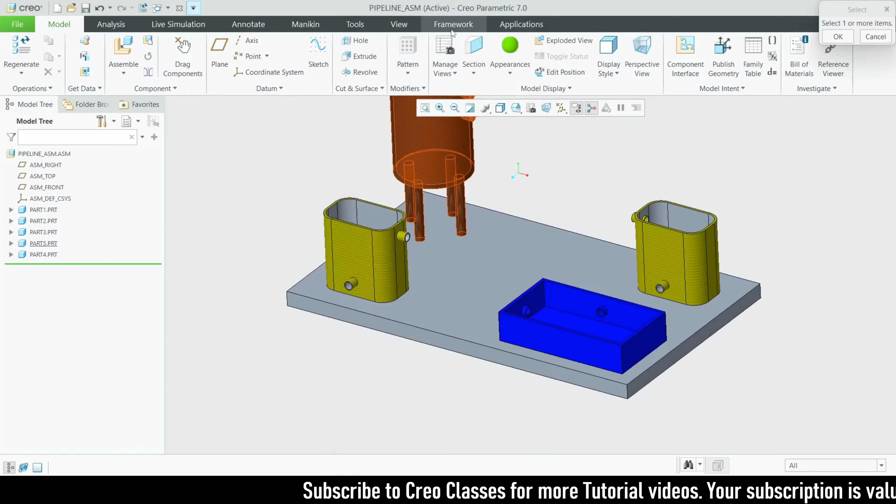So this color is not good, I think. We can select some more. Yeah, we can select this color also. Then click on OK.

So we have already given a color for the top plane, so it is not selecting. We have to select the surface again. So for the inner surface of this inside, we have to give some water color for that.

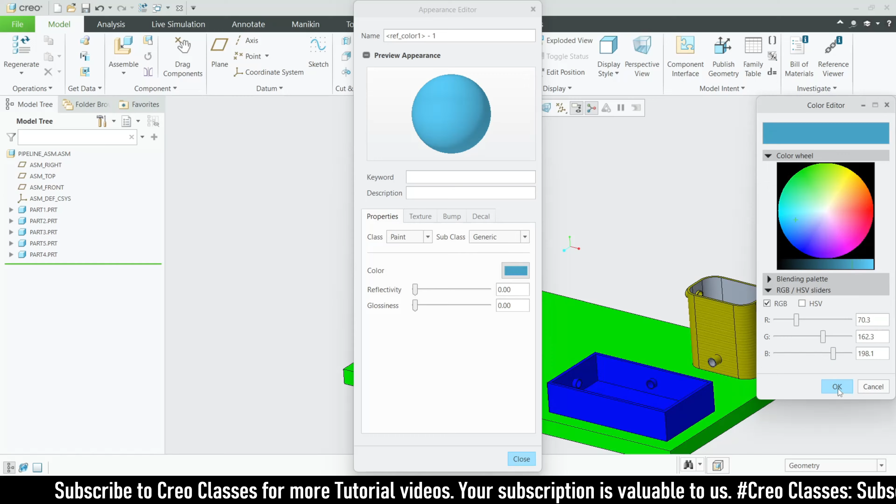So I can't find water color in this template. So I'm going to create some blue color from this wheel, like yeah, like this. Close this, select this appearance, and go for the inner surface.

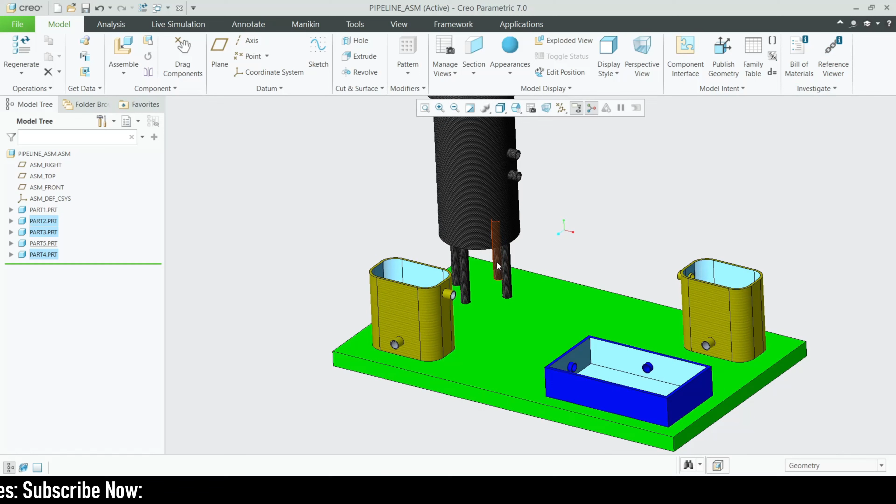Select this inner surface, select this inner surface, select this. So why I'm giving this light blue color for this inner surface is because in this inner surface only the water will be stored, so to show it differently, I'm going to give this color.

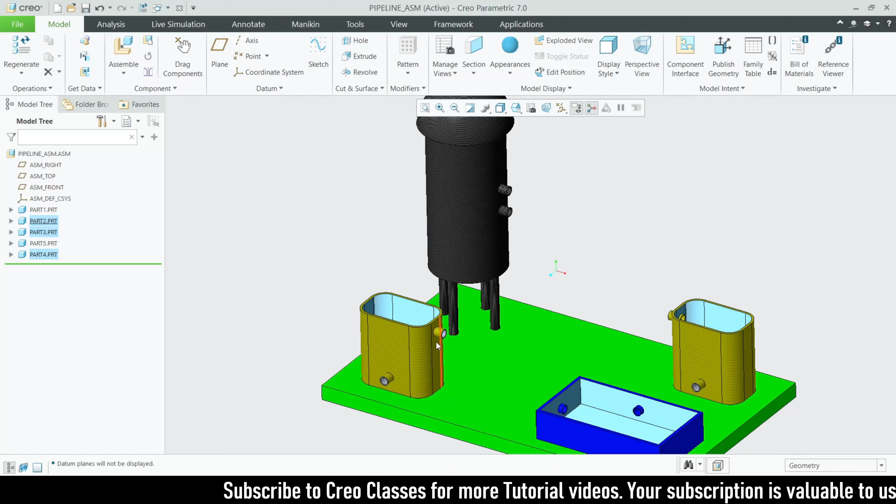That's all, guys. So we have created and assembled all our parts, and let's give the piping option for this output and input, from this output to this input, and from this output to this, and from this to this.

So we will see in the next video about how to create that piping line feature and what are all the features available in that piping option. So let's see deeper in the next video.